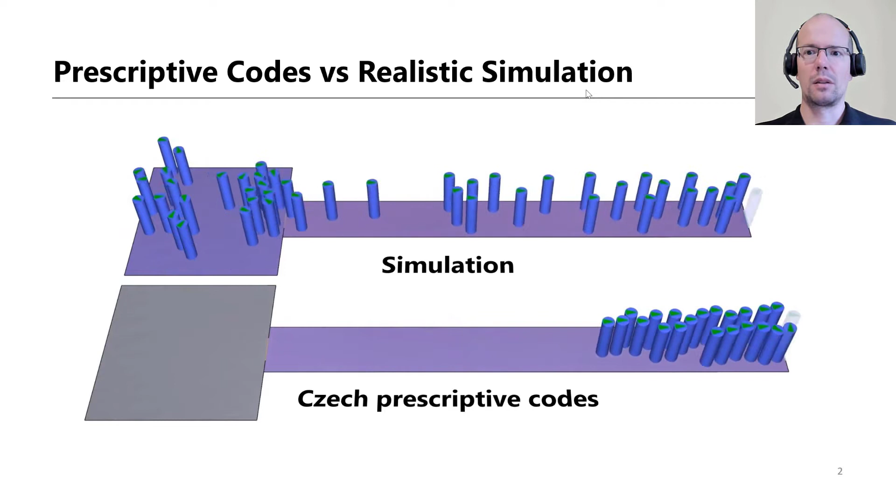You can see here a comparison of this behavior of two identical groups of people in the same geometry. The upper simulation applies parameters within the Pathfinder model. The lower simulation reproduces the behavior of people as seen by the prescriptive code. The codes do not consider different walking speeds of pedestrians depending on age or ability to move. They also work only with zero response time to the alarm.

Pedestrians with some disabilities are considered by increasing the width of escape lanes, which is the required evacuation route through the building. So the pedestrian movement is similar to the passengers at the airport on various moving walkways, but with uniform space gaps. This approach makes it possible to calculate the escape routes without any additional technical requirements. This is a very simple approach, and it is compensated by very conservative values, such as the walking speeds. The results are then usually significantly on the safe side.

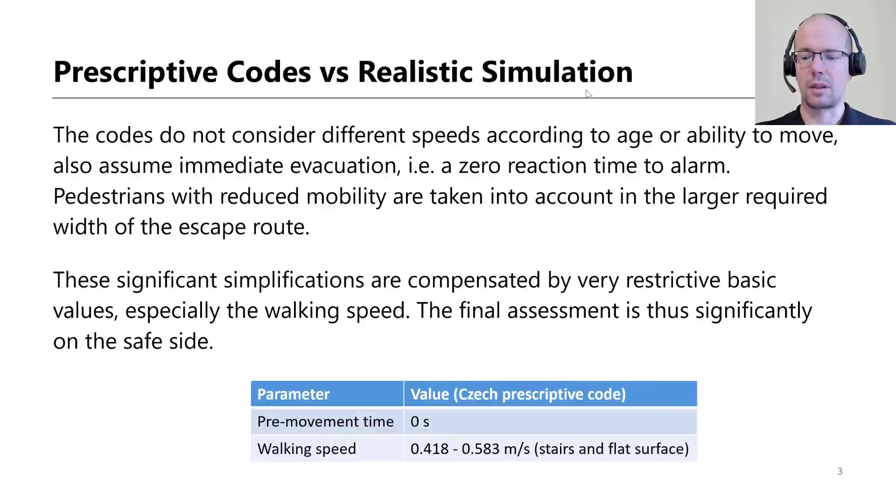So why do we need pedestrian simulations? The first important application is very complex buildings, such as stadiums. For these types of buildings, the above-mentioned approach reaches its limits very fast. An example is the project of UEFA football stadium, Class 4, which is the best class suitable for Champions League final games, planned for Brno, which we analyzed 3 years ago for the city.

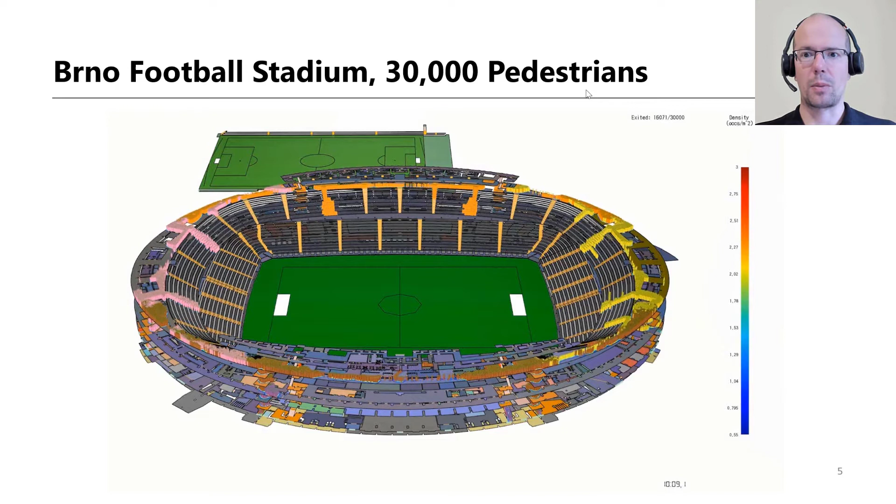On the following animation, you can see the model with 30,000 visitors. It should be noted that the blueprints were prepared 10 years ago with CAD in only 2 dimensions, so pedestrians move on the flat surface only. We performed simulation tests for the full occupancy of 30,000 visitors and showed that the total evacuation time, 95th percentile, is more than 27 minutes, and approximately 1/3 of pedestrians are delayed for more than 5 minutes in the various types of jams during evacuation, as you can see here.

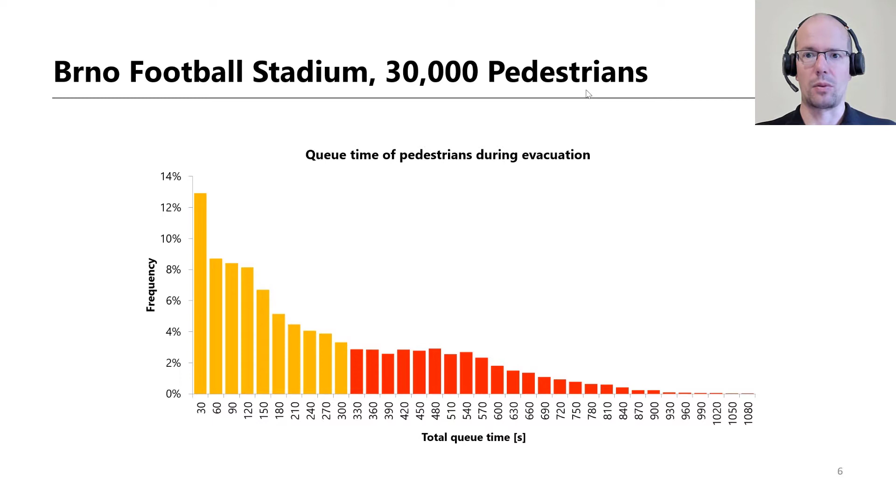The second application is objects or situations which we refer to as so-called soft targets. The term is used by the security community to refer to places with a high concentration of visitors and a low level of security against violent attacks. The attack will cause a situation where the assessment using a prescriptive code is not possible anymore.

The reason is simple. The fire safety assessment using prescriptive codes is designed for a case of fire, and in this case of a fire, all evacuation exits will be available, fire alarms will work, and so on. In the case of a terrorist attack, however, the attacker's very basic motivation is to change the situation. A typical example would be a truck blocking one of the main exits or a smoke cartridge thrown into an escape route.

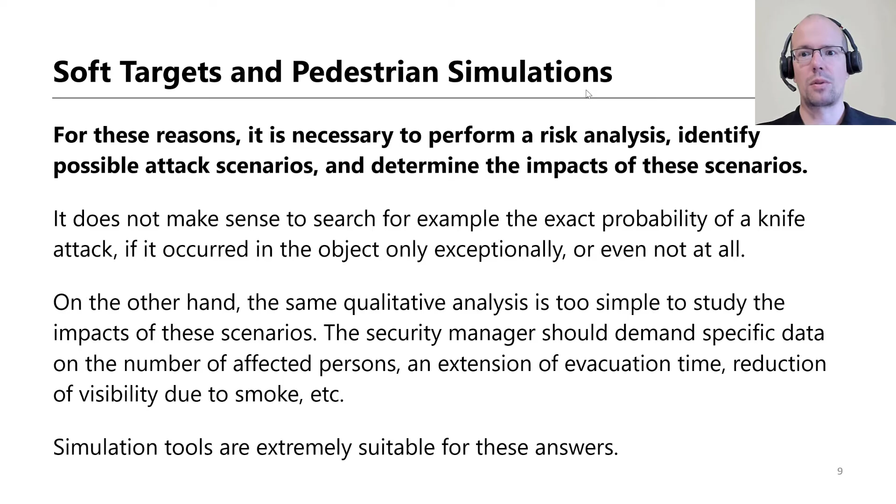During the winter months this year, we applied this procedure to the main railway station in Prague, where we tested the evacuation scenarios for the security managers caused by various types of attack. These situations may include, for example, suspected explosive devices or a shooter inside or outside of the object. These situations were tested for different occupancy and statistically processed. But the appropriate risk analysis was the first step for identifying these scenarios.

Risk identification has four main phases: asset analysis, where asset is anything which is valuable for us, threat analysis, vulnerability analysis, and determination of the resulting risk. The methods applied in the identification are qualitative, which means probability of occurrence and probability of loss of value, or quantitative, which means determination of vulnerability and degree of threat, or combined semi-quantitative.

The risk assessment can be summarized in the following table that reflects a combined semi-quantitative approach. Then it is possible to quantify the risk by using the following relationships to assess and express risk. We should also express how the risks can interact with each other. For this purpose, we can apply quantitative risk analysis with their correlation in the following table. This method expresses the activity or passivity of each risk. Activity means that the selected risk has the potential to cause another risk, while passivity means that the selected risk has the potential to be caused by another risk.

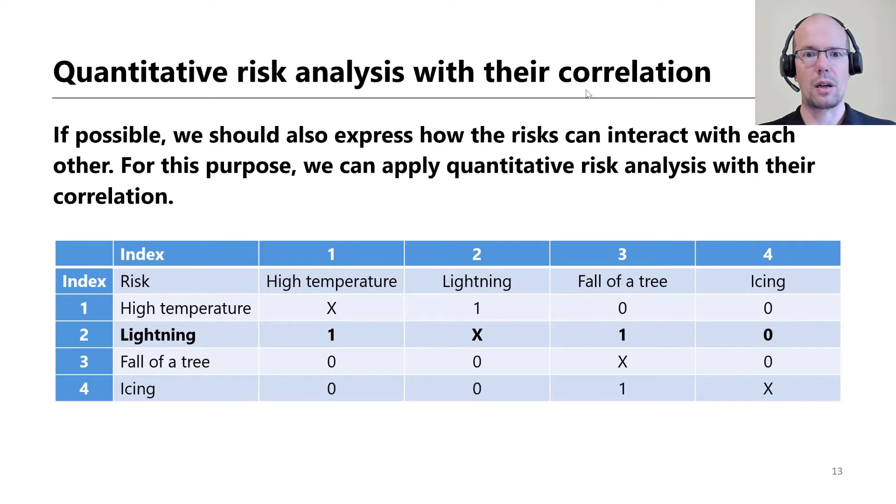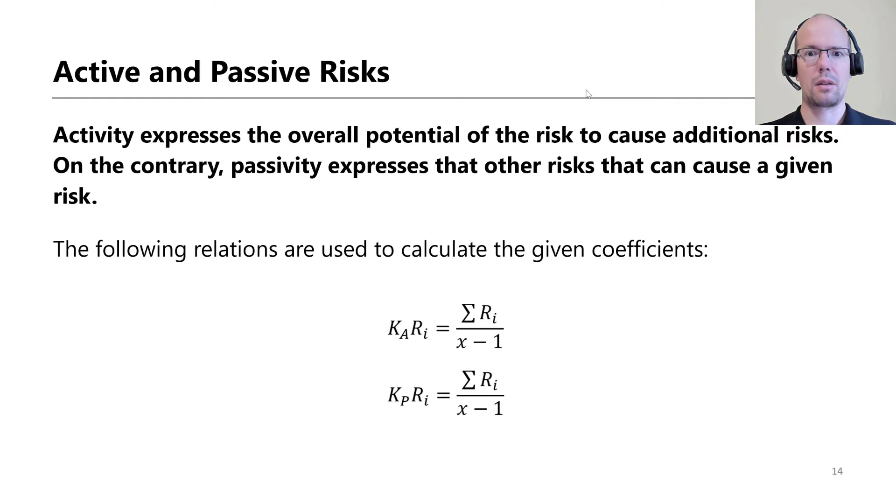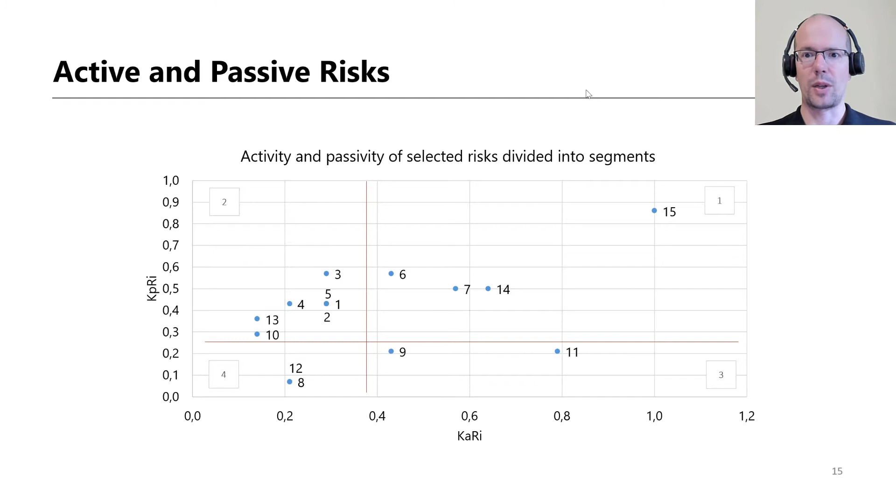Then we are able to calculate the following variables of activity and passivity for each of the risks. For the activity coefficient, the sum of the risk is the horizontal axis, and for the passivity coefficient, it is the vertical axis. X is the total number of risks. These values can be plotted. It allows us to determine the most significant risks very easily. For better clarity, it is appropriate to divide the plot into segments. We define lines which divide the plot into segments, assuming that in the first segment there will be 80% of the most significant risks. These are primary risks with the highest coefficient of passivity and activity together.

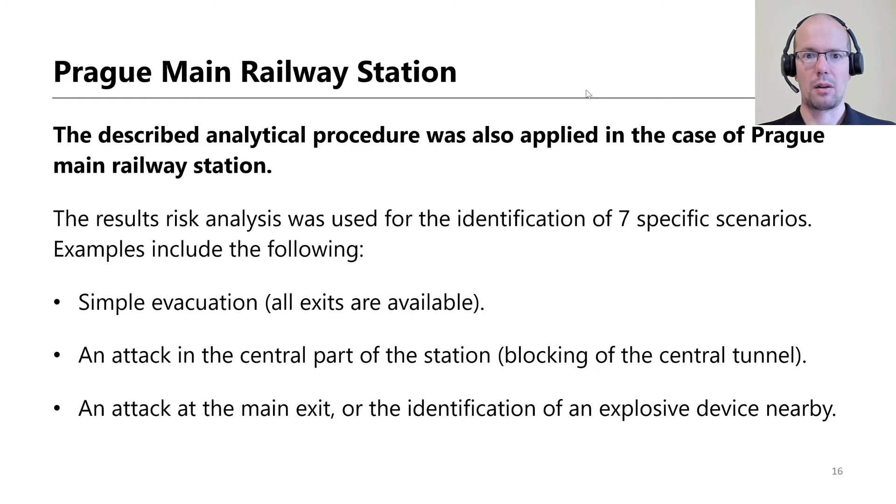The described procedure was also applied in the case of Prague main railway station. The results of the risk analysis were used for the identification of several specific scenarios. Examples include the following: simple evacuation, where all exits are available, an attack in the central part of the station, which means blocking of the central tunnel, an attack at the main exit, or identification of an explosive device nearby. These and other scenarios were then simulated using the Pathfinder model to find exact impacts. Results were implemented into the guidelines for security managers.

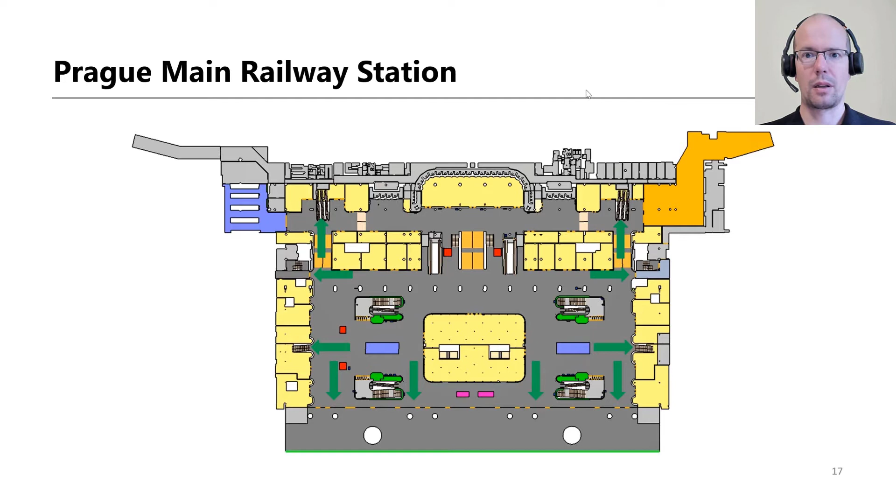Here you can see the floor plan of the Prague main railway station with the escape routes. The station has the main entrance from Vrchlického sady street, which is bottom, and 6 side entrances. Below the check-in hall, there is a subway station of line C. Evacuation from the subway takes place using escalators and stairs to the lobby of the check-in hall and then outside.

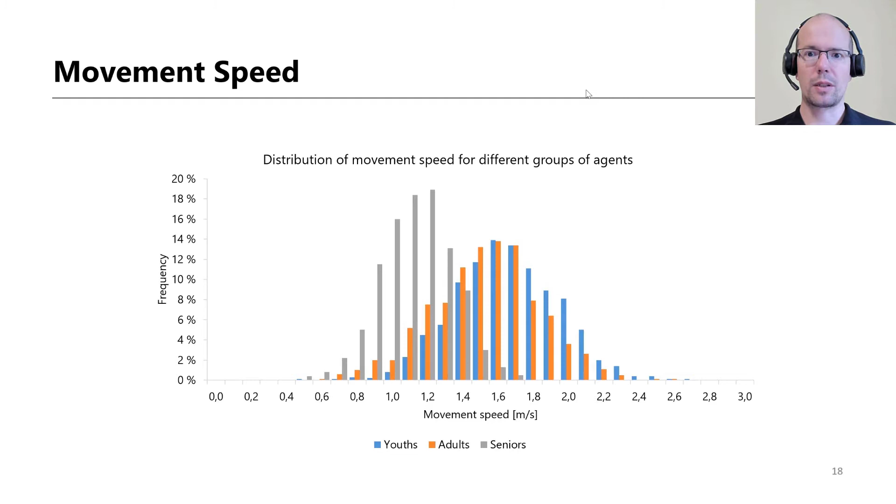Experimental data, especially the real evacuation trial and long-term empirical measurements, were not available. For this reason, we tried to define the appropriate characteristics, especially the movement speed and pre-movement time, for agents from the related studies mentioned in the references. Here you can see the distribution of movement speeds for different groups of agents: youngsters, adults, and seniors.

The pre-movement time was derived using the same sources. The key is to maintain a log normal distribution according to the empirical knowledge. The mean value of the pre-movement time is then about 60 seconds, with a standard deviation about 30 seconds. The values of 5% and 95% quantiles, which means 20 seconds and 120 seconds, were used as the boundary values for the simulation settings in the green region.

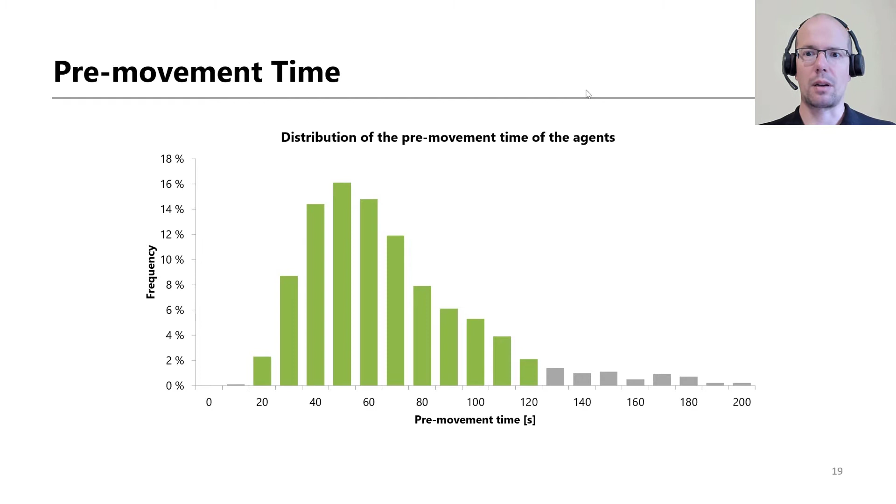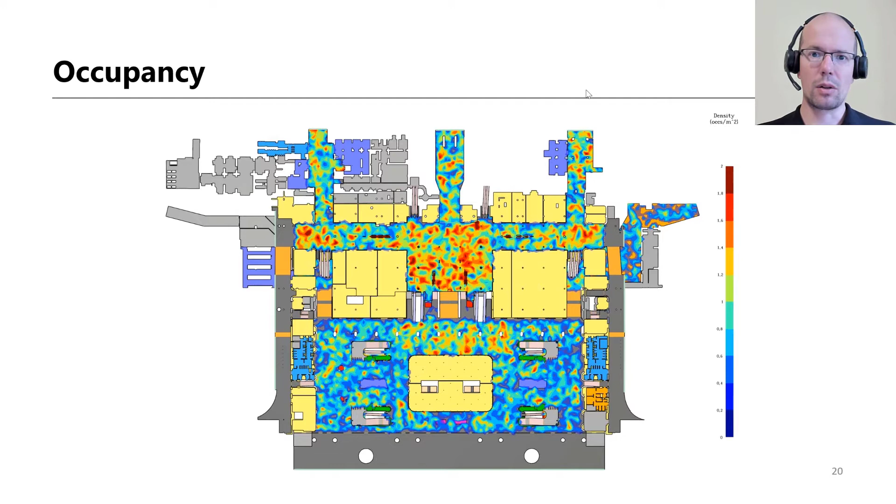The initial occupancy is based on the documents for the original fire safety assessment of the building, with the basic value of 6,000 commuters in the building. Our analysis then adds other real occupancies in the range of 1,000 to 10,000 commuters, with a step of 1,000 commuters to cover all relevant daily, weekly, or annual variations. Here you can see the distribution of agents with the density of 0 to 2 agents per square meter, according to the real experience of the security managers.

Both the distribution of agents in the station and the distribution of their parameters within the population have a significant impact on the evacuation time, so we use the Monte Carlo approach. The individual scenarios were gradually loaded by increasing occupancy. For each scenario and occupancy level, we ran tens of simulations with a random distribution of agents and statistical distribution of their parameters. We then focused on the following results.

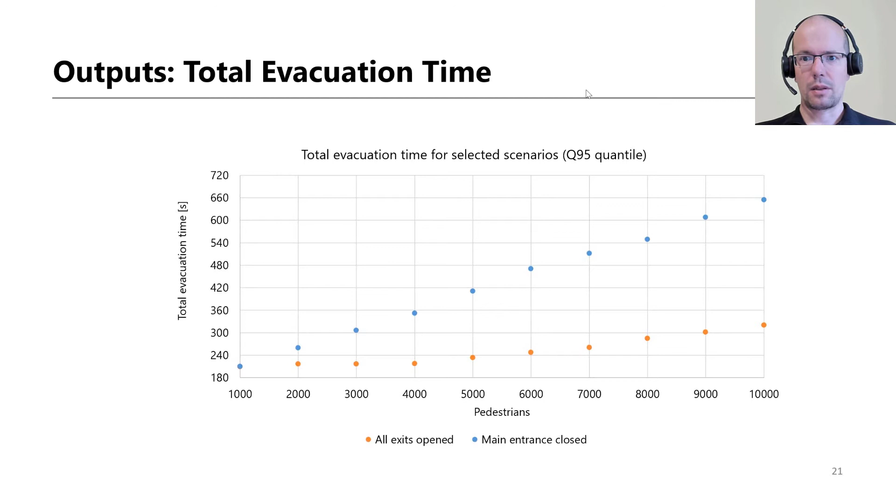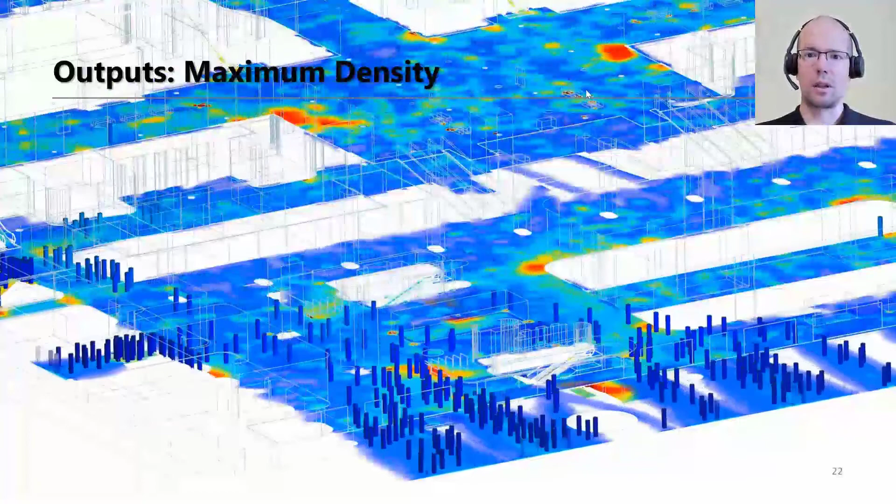The first one is a well-known total evacuation time. This is the moment when the last agent leaves the station. We consider various quantiles like 95% quantile. All is described by graphs and tables. Here you can see my favorite output, which is maximum density map, very useful for security managers. It is displayed as a heat map to find parts of the station where a critical density has formed at any time during the evacuation. The color of the agents on the simulation corresponds to the time remaining until they leave the station.

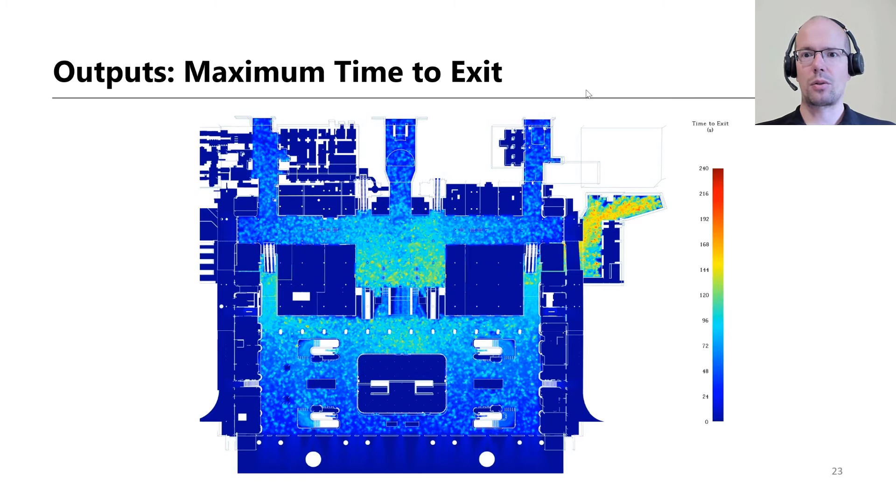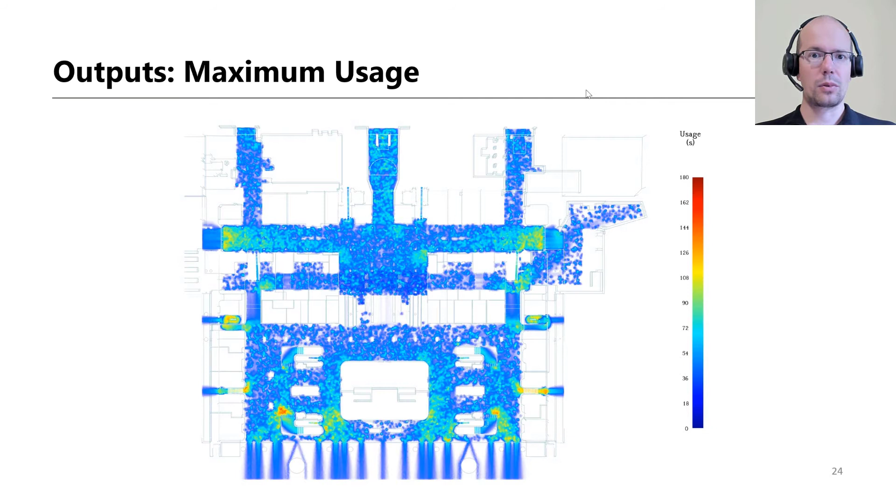Here you can see maximum time to exit. This output helps to find places in the building from which evacuation is most complicated and where the security manager should focus its actions at first. And the last picture, maximum usage. It shows how long the jam prevailed. The longer the congestion, the higher the frustration of people and the greater the risk of injury or panic. This output should be combined with the density output for the best interpretation.

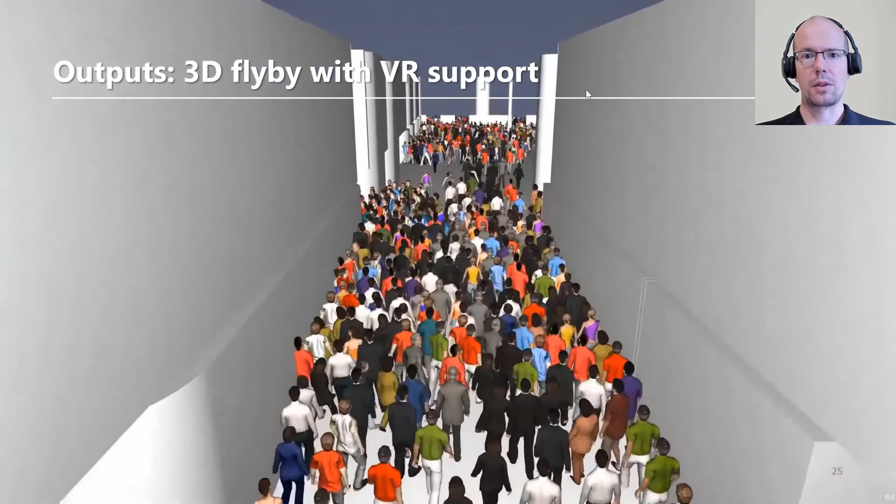For the client, we also created a flyby in various situations, which can be observed in VR. The security managers are able to check the applied measures this way. In total, we analyzed 7 different scenarios, each with a capacity of 1,000 to 10,000 commuters. For each occupancy, tens of simulations with random input parameters. This means several thousands of individual simulations.

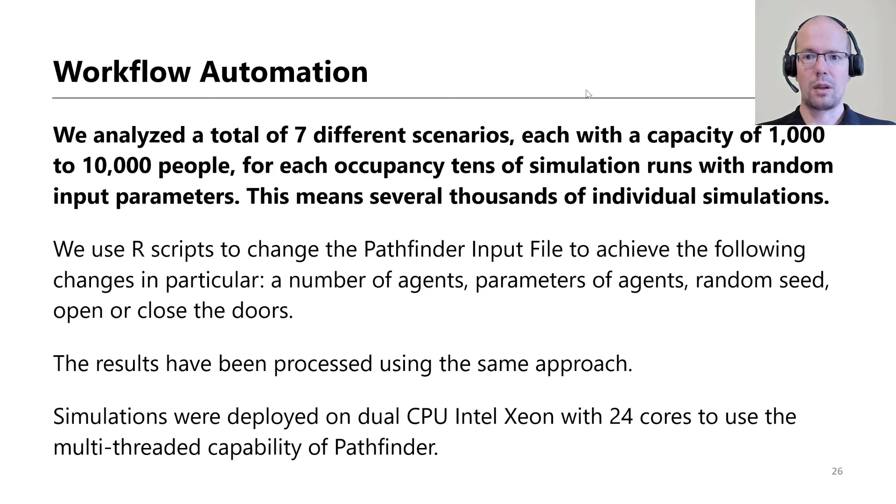This procedure would not be possible without advanced automation, in our case using scripts in the R statistical language. We modified the Pathfinder input file to achieve the following changes: number of agents, parameters of agents, random seed, to open or close the doors. The results have been processed using the same approach. Besides the third-party software tools, it was also important to deploy a computing server. In our case, it was dual CPU Intel Xeon with 24 cores for multi-threaded processing of Pathfinder simulations. Without this platform, it would not be possible to carry out simulation tests in a sufficient time.

The soft targets protection is a long-term issue, especially in developed countries, which are the target of terrorist attack and similar threats. The development of simulation tools has enabled a new level of accuracy for the risk analysis applied by security professionals. When applying, we must use the correct approach of risk analysis and interpret these risks in the simulation tools. An example is the occurrence of the shooter outside of the object, which we interpret by closing specific escape routes. Among the simulation results, in addition to the evacuation time, we must also include other outputs that are important for security managers, for example, heat map of time to exit.

Further development will depend also on the level of digitalization of the construction industry. A very good example is the building information models, which we applied in another of our studies of soft targets, the Prague subway station. You can see much better visual properties when comparing to the football stadium.

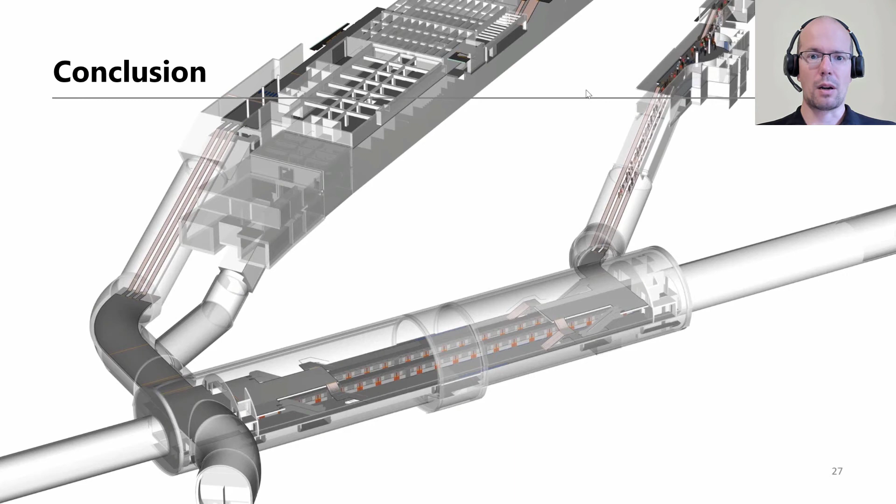Support for the key standards like Industry Foundation Classes by simulation tools significantly speeds up the analysis, makes it less expensive, and enables much more attractive visualization. This will enable us to further replace an assessment through prescriptive codes wherever it makes sense.